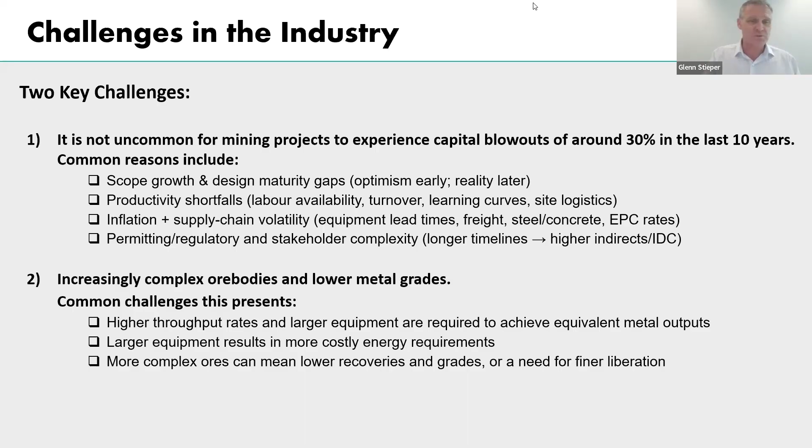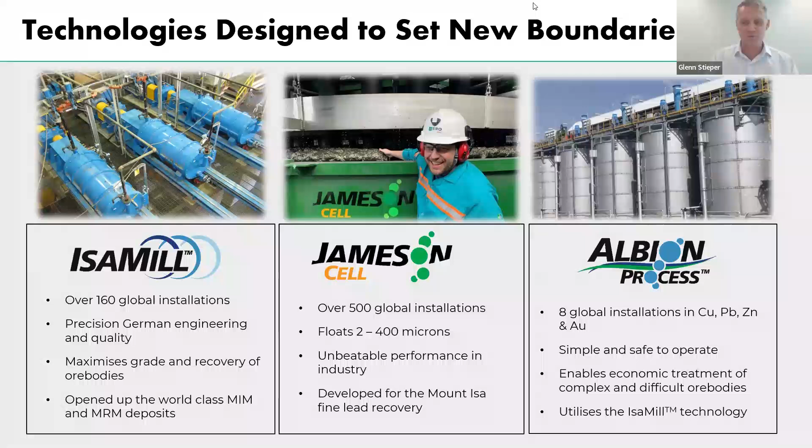Moving on to the first of my questions, which was around reducing costs: one of the areas we've been pushing quite aggressively into is combining the Jameson cell and IsaMill into what we call the Jameson concentrator. It's a full plant, meaning there's no conventional or other type of flotation devices there. It's purely just Jameson cells, which makes up the entire circuit. By doing this, we get around 1/4, maybe 1/3 less flotation units, so it's a significant reduction in size. It's also a big reduction in capex.

We see around 30% drop in capex, primarily driven by lower steel, concrete, and footprint. But we also have a lot of reduction in energy, around 45% lower energy. There's no blowers used in a Jameson cell, there's no agitators, there's really just pumps. That's the only moving part on a Jameson cell, which also makes it much lower in terms of maintenance requirements and spare parts. Everything else is basically static and very simple to maintain.

Just to the right, a couple of examples: we had the Jameson concentrator, which has been operating for quite a few years at New Britannia, a HudBay operation. 4 Jameson cells replace 11 tank cells, and that circuit is performing extremely well. Hermosa is a full concentrator currently under construction in Arizona, United States, with 12 Jameson cells replacing what would have been 40 tank cells — again, big reductions in footprint and complexity. At the Ozernaya site, shown at the bottom, 63 tank cells were replaced with 19 Jameson cells, and that's the picture you can see showing the huge difference in plant size.

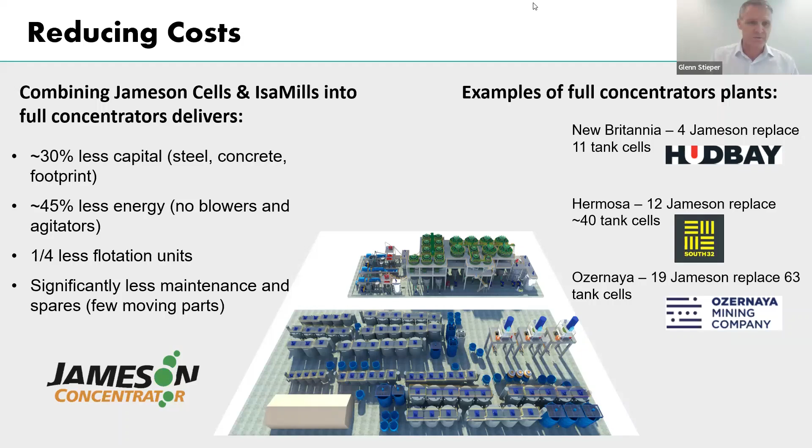So a question we obviously get quite often is: how can you do that?

How can you simply reduce it so small and yet get such high performance and have all those savings? I think the savings are obvious through the reduction in size and units, but how do you still get really, really high performance? That's probably the key differentiator and the reason why we're so excited about where this is moving the industry.

As I mentioned before, the particle size range is very important - the 2 to 400 microns, having that in a standard configured Jameson cell. Wash water systems enable us to essentially wash out all the gangue without sacrificing any of the recovery, which gives us a higher grade. But by washing out the gangue, it also gives us a huge reduction in mass pull, and that basically means everything going down the circuit is heavily reduced. You're not bringing gangue and clays and things like that into the circuit and oversizing your plant.

Finer bubbles that are generated also create significantly higher surface area compared to conventional flotation with big bubbles. And also, one of the key components - and this is the part that a lot of metallurgists in the industry for many, many years, almost a century, struggle with - is the fact that the flotation or the contact happens in around 2 to 4 seconds, not 40 to 60 minutes, which is what you have in standard configurations of your flotation circuit. So just having a quick look now at what that looks like on these graphs.

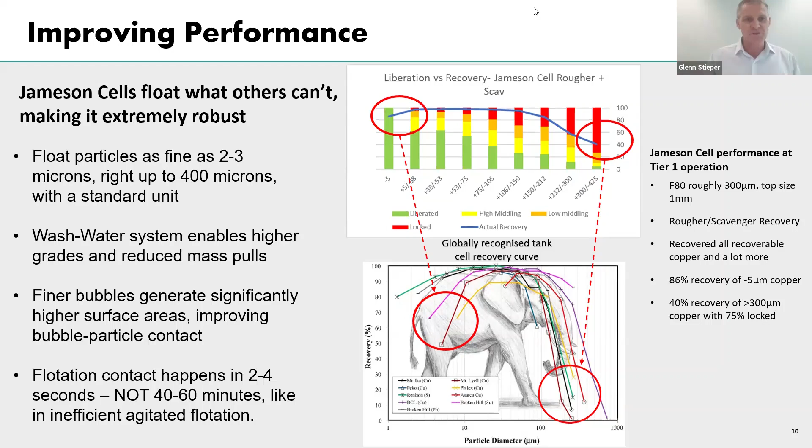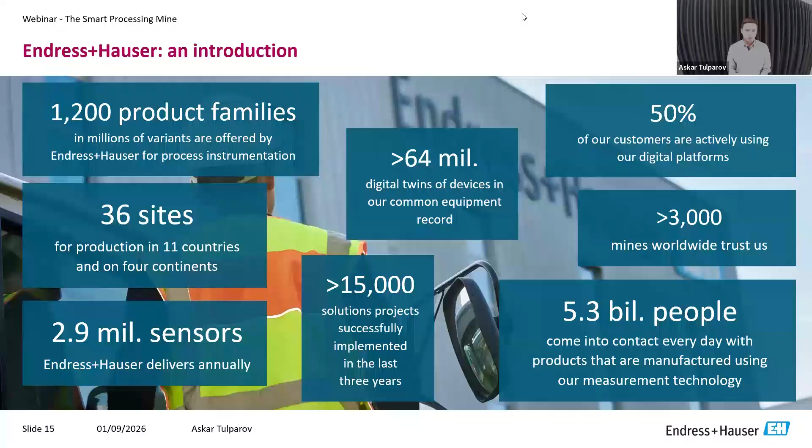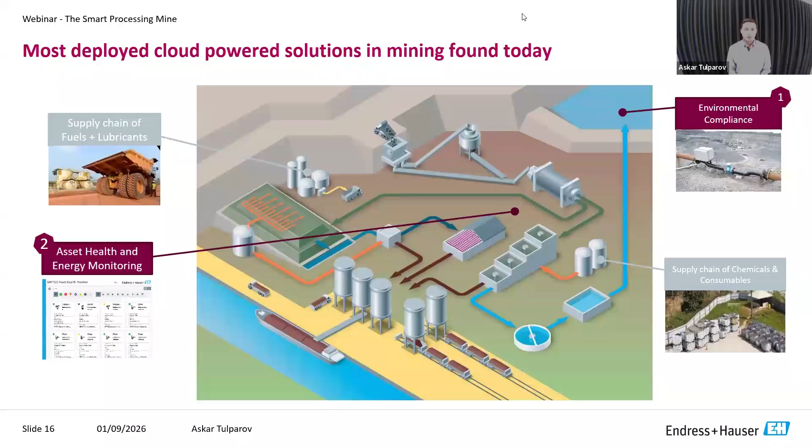Now, if we talk about mining in terms of solutions with cloud connectivity, we know that some applications and areas of the mine globally and in Australia have been more readily accepted than others. We find the most common applications in environmental monitoring and compliance, asset health and energy monitoring, and then supply chain monitoring, or monitoring inventory of supplies or fuels.

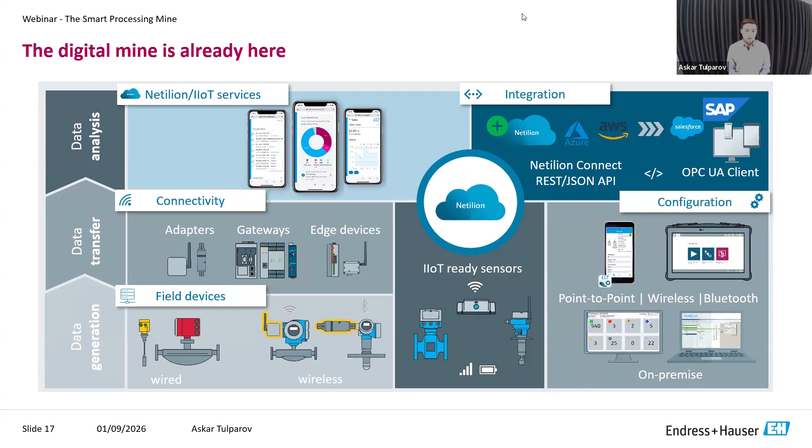Then asset management data is all available via digital communication outputs, and all of this can be managed either on premise or wirelessly. The ERP integration then goes via OPC UA client to provide the necessary information from the field devices. In addition, we can also rely on and use our own Netilion cloud-based industrial ecosystem as well.

Now let's have a look in more detail at the field devices and what kind of process parameters you can get from that instrument. First, condition monitoring, enabling predictive maintenance by identifying process conditions that may negatively affect device or asset integrity or process performance. Long-term effects like corrosion, abrasion, buildup, to know the optimal time to clean, then mechanical stress, thermal stress, or sensor aging from radiation gamma sources.

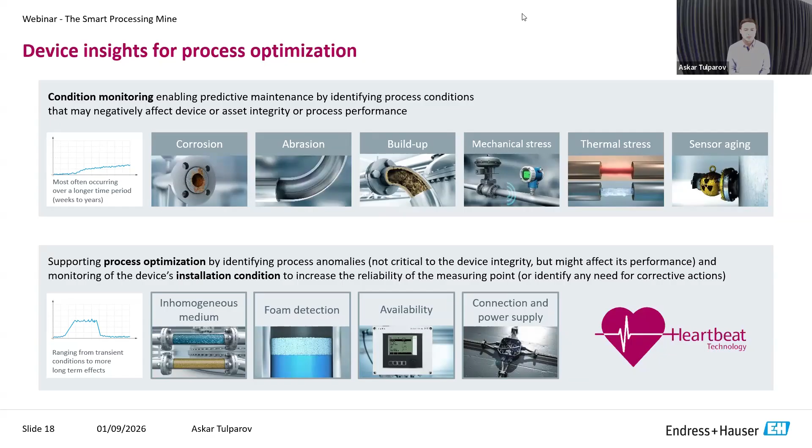Secondly, supporting process optimization by identifying process anomalies not critical to device integrity but which might affect performance, and monitoring the device's installation condition to increase reliability of the measurement point or identify any need for corrective actions. For short-term effects, we have a very high-speed Ethernet APL protocol, a new value with lots of potential - for example, optimizing mixing and blending or pump speed to reduce bubbles.

To support you in reaching your goals, Endress+Hauser has implemented its own Heartbeat Technology into many measurement devices across our product portfolio. Its unique diagnostic, verification, and monitoring functions all aim to support you in your daily striving to increase plant performance, with highest confidence in device performance due to outstanding diagnostic capabilities and international standard compliant development.

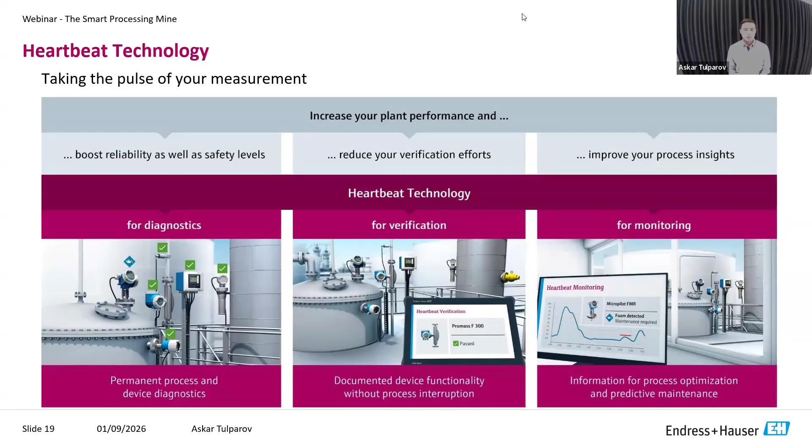Efficient operations are supported by timely, clear, and standardized diagnostic messages, providing easy to follow recommendations on the actions needed. Optimize calibration and proof test cycles through traceable device verification without process interruption, which is very important. This gives improved insight on device and process conditions to optimize the process and keep operations stable.

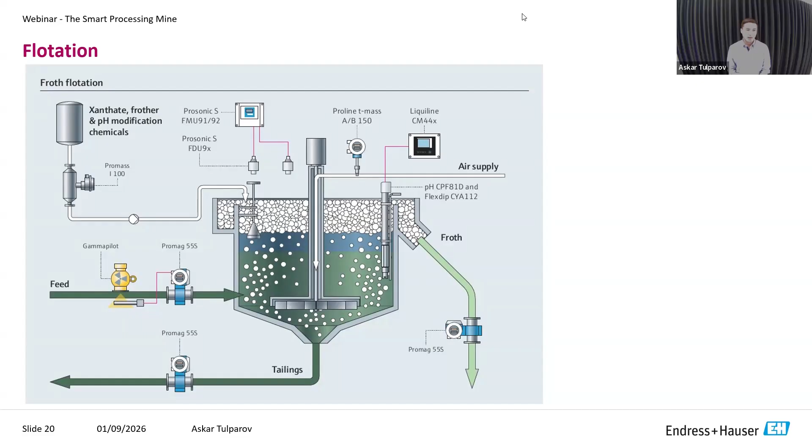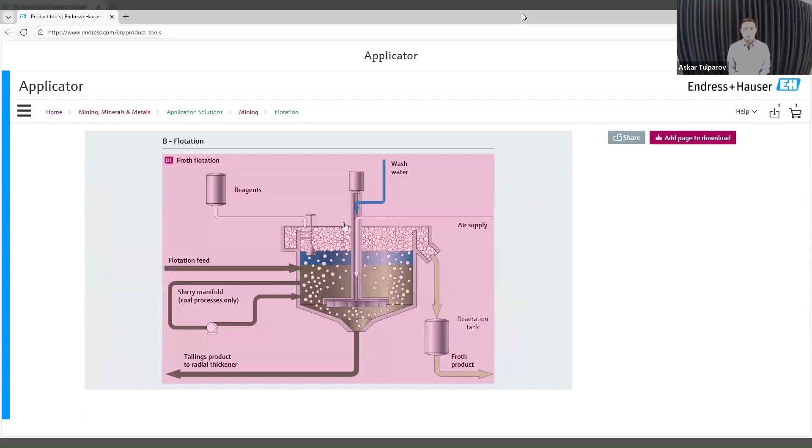To summarize today's speech, here's a short animation video showing that flotation process as an example, and generally how easy and fast you can get access to our online tool, the Applicator, to do full engineering sizing on your own at any time, to find the right instrument for your exact application needs, with detailed information like price, drawings, production time, spare part lists, and finally printed out results at the end. So my message to all of you: please feel free to open our website, test it, and use it on your daily basis.

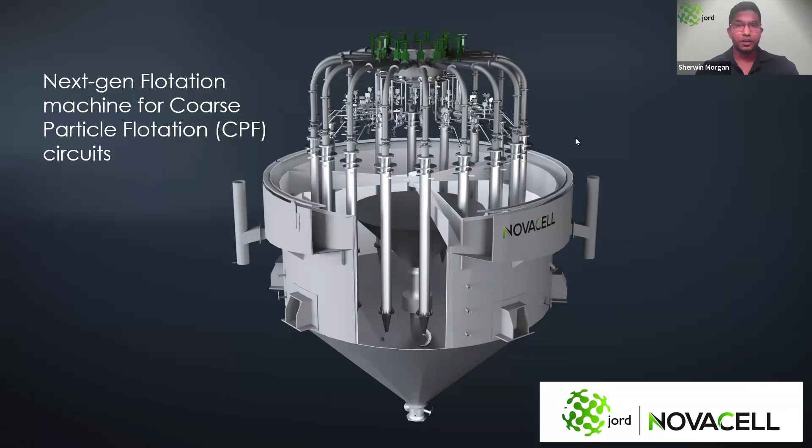So this technology is being commercialized by Jord. Jord is an Australian company, privately owned. It services multiple industries, and the Novacell and the Viper sit in the minerals processing group. Jord has been around for 50 years and has plants in multiple countries.

So why is there a big buzz about coarse particle flotation? Most of the tier 1 miners and mid-cap miners are starting to include this in their flow sheets. It's because it adds a lot of benefits.

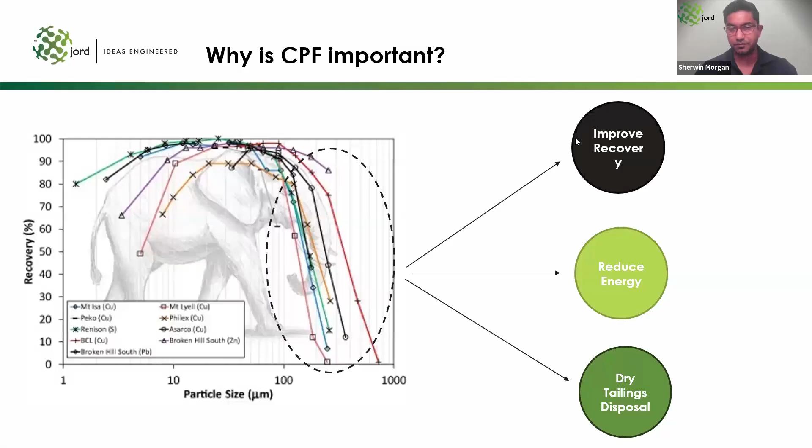It also allows you to reduce energy. So if you can recover particles at a coarser grind size, there's less energy in the comminution circuit. And then finally, if the particles are coarser, it's far easier to dewater, so it then opens up opportunities to adopt new tailings management solutions.

So why is Jord's solution different to what else is out there in terms of coarse particle flotation? Mainly because we've simplified the flow sheet. Because we can recover fine, intermediate, and coarse particles, there's no need to have an upfront deslime circuit.

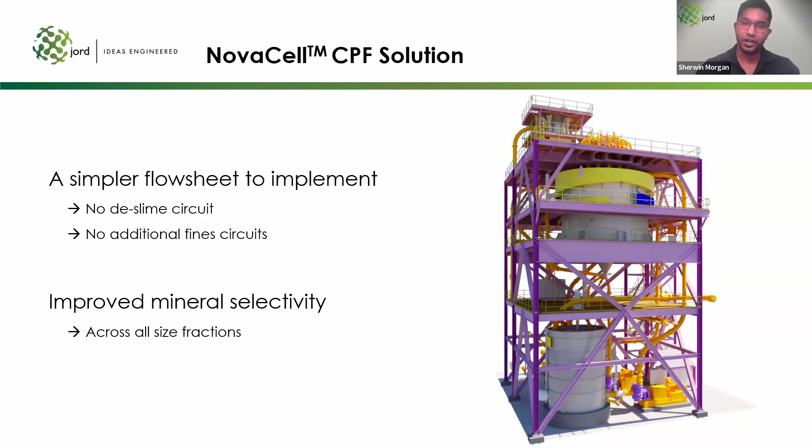A lot of the existing technologies struggle on the finer end, so they need to remove these particles and treat them separately in the flow sheet. With the Novacell, we don't have that challenge. We put everything through one device, and we're able to get mineral selectivity across all particles.

So here's a case study. We've been working closely with Capstone Copper for a few years, and we've tested this technology at one of their mine sites in Chile, called Mantos Blancos in the Antofagasta region. And there were two key criteria that Capstone Copper wanted: firstly, there was a recovery target, and there was also an enrichment target.

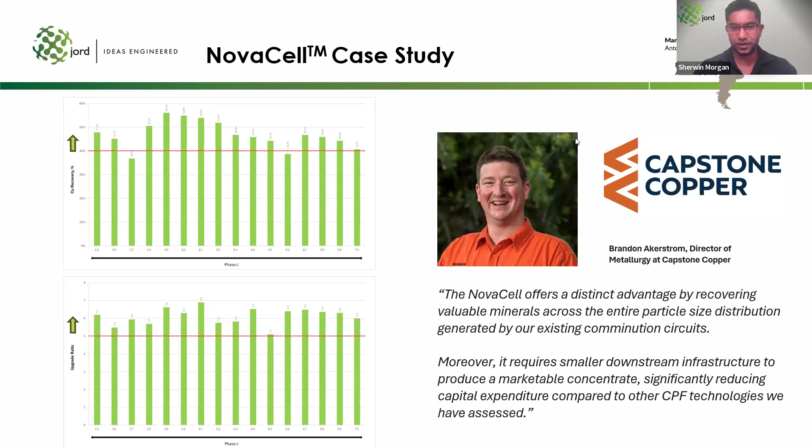So finally, if you're interested in this technology, we offer two ways to investigate it. We have a lab unit here in Australia, at Core Resources in Brisbane, but also we have a unit in Santiago in Chile at AMinpro. We also have a pilot unit that comes in two 20-foot shipping containers that can be set up on site to test this technology. I'll now hand over to Sam, who will talk about the Viper.

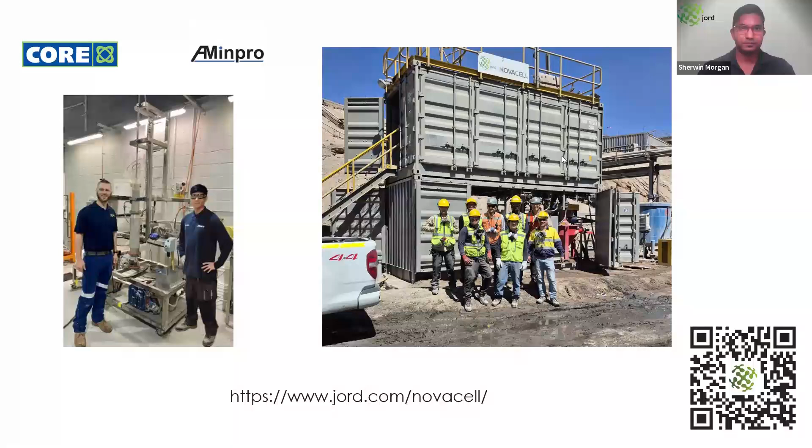Just as Sherwin did at the start of his presentation, I'd also like to note the similarities between some of the content I'm about to go through in the dewatering space. That's very similar to the theme Glenn established at the start of this presentation, based around how companies are looking to overcome capital blowout headwinds for new projects, and ways to manage complexity with new innovative processing solutions.

In the vacuum belt filter space, Jord is one of the leading suppliers in Australia, where we've been building these systems for over 30 years. Out of that experience, the Viper technology has been born. So what is the Viper technology? It's our patented innovation that significantly improves the baseline performance of the traditional vacuum belt system, a technology that's been around for that whole period.

We've recently invented these Viper modules, shown in the green module sitting on top of the belt filter in this example image. These modules can either be delivered as new equipment, as a fully assembled Viper vacuum belt filter, or retrofit onto existing vacuum belt filters in order to reduce the final moisture content of the cake being discharged and/or increase the capacity of the existing belt filter.

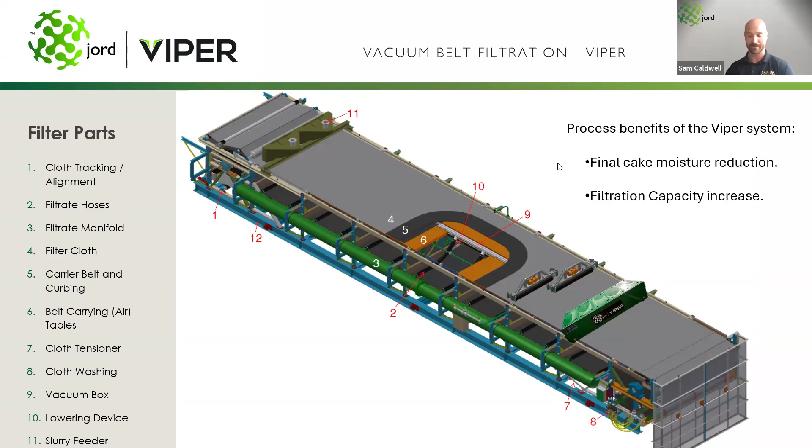Those two main benefits are really important in the dewatering space, because it unlocks the vacuum belt filter for more challenging, historically difficult to dewater applications. The reason that unlocking is important is shown in this comparison image here.

On the left-hand side and the right-hand side, we have two processing plants built in Australia that are operating the same tons per hour of solids, processing a very similar feed type in gold tailings material. The plant on the left-hand side is a filter press plant - Jord also manufactures filter presses - which we delivered a couple of years ago. The left-hand side plant is much larger, as you can see in this comparison. It's more complex, and therefore a much greater cost and more challenging to operate.

On the right-hand side, post the invention of Viper, we have a smaller, more simple overall layout that's lower in capital costs and more simple to operate. To give you a gauge of the order of magnitude of reduction in capital spend and operational expenditure for the dewatering scope in these projects, we're looking at anything of 50% or more reduction in capital costs for the dewatering solution for a given application, and at least a 20% reduction in operational costs of that plant over its life.

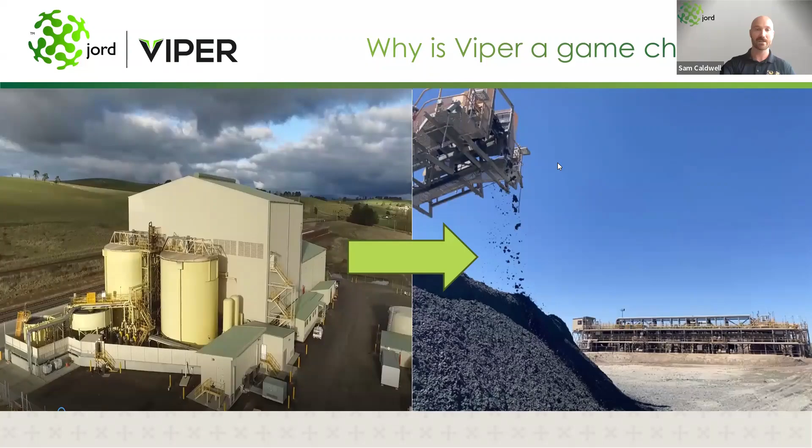So some pretty significant step change reductions in both CapEx and OpEx costs, with the ability to now select the vacuum belt filter for a given application based on the existence of this Viper technology. In regards to our operating references, we have in the order of 100 Viper modules operating around the globe today.

Currently, I want to highlight this reference: the largest duty is the dewatering of fine grind magnetite concentrate at this plant in Port Hedland, WA, with a duty in the order of 20 million tonnes per annum of magnetite concentrate. The real significant point is 100% of the saleable product from this mine needs to be dewatered by these belt filters, which is the last stage of the flow sheet before it gets conveyed onto a ship and sold to the client.

So if we can't meet the performance, moisture content, and tonnage requirements for this project, there is no further piece of processing equipment between this plant and sale to the client. I like to highlight that to really reflect the level of confidence the existing customer base has in this technology today. Thank you, Sam.

Sorry, go ahead - sorry, your time is over. Do you want to just finish up quickly if you want? Yep, sure, just take 10 seconds here.

In order to scope up your given application, we have bench scale and pilot scale test work capabilities in order to identify and demonstrate the benefit that this technology can bring to your application.

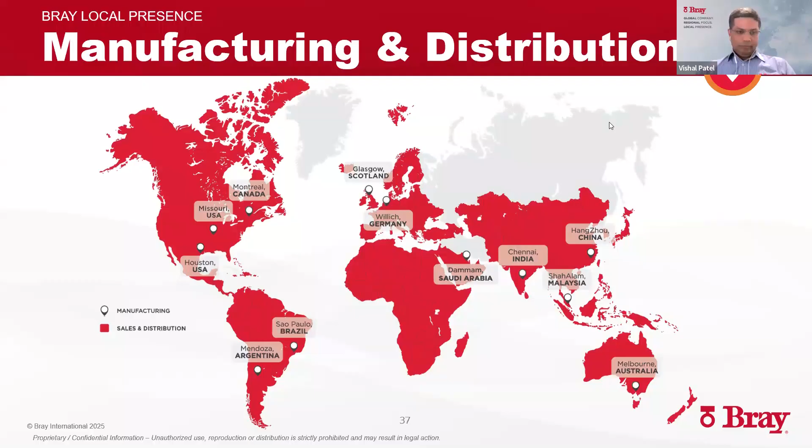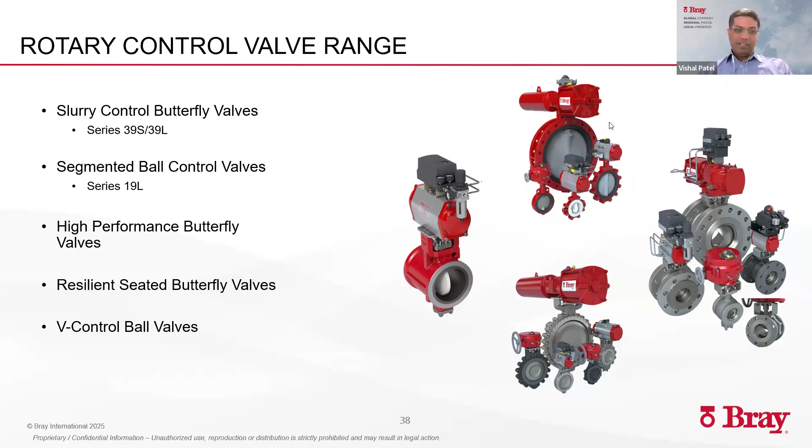A quick snapshot on the rotary control valve range that Bray has. In the interest of time, today we'll only be looking at a couple of them, but we have slurry control butterfly valves, a Series 39 S and L, segmented ball control valves. We'll be touching on Series 19L.

We also have high performance butterfly valves, resilient-seated butterfly valves, as well as V-control ball valves. The Series 39 slurry control butterfly valve was initially designed or engineered by Bray Pacific to cater for the alumina industry for the arduous high abrasion, high velocity, and scaling applications. On the back of the success in that industry, the 39 series slurry control valve has made its use case in the mining industry as well.

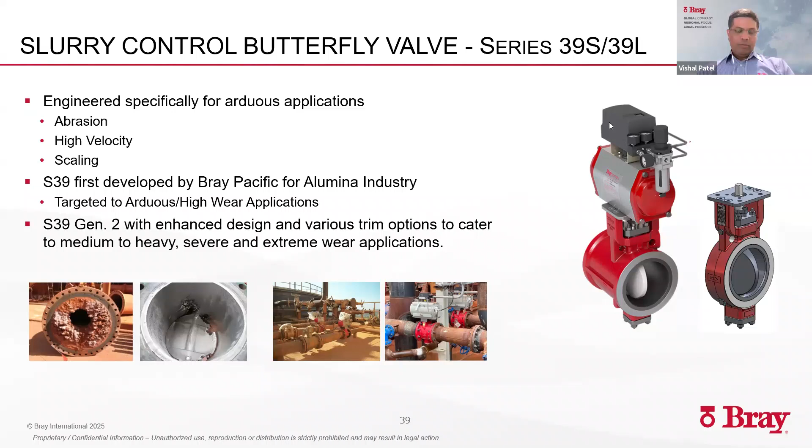Most recently, we have what we say is generation 2 of the Series 39 slurry control valve, which has an enhanced design with various trim options to cater to medium to extreme wear applications. This particular slurry control valve has a fully lined body with no dead pockets and a hardened material disc, which is a swing-through design. We have various options from a trim perspective, depending on the severity of the wear and the application, where we would specify either a 4mm CO1 or CO2 trim on the lined versions, up to a size of 600 mil.

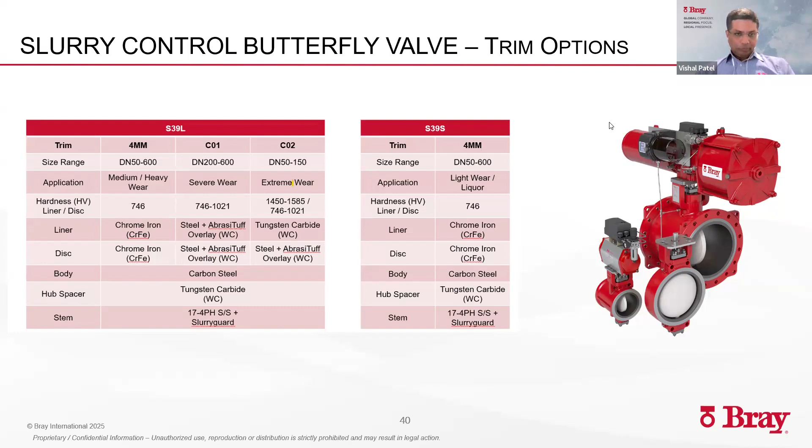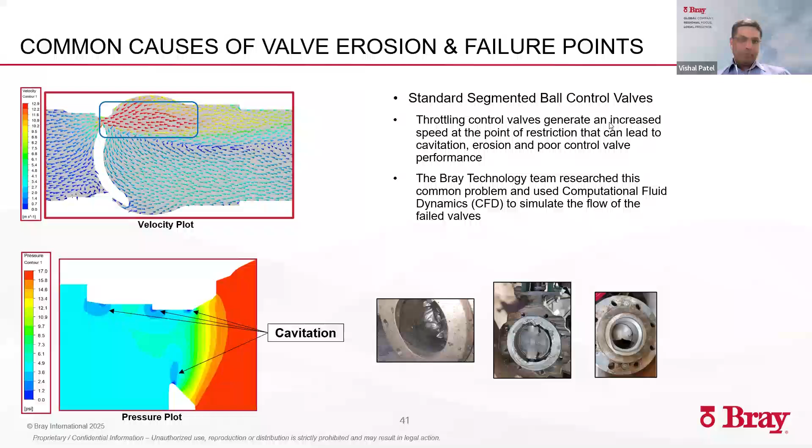So Bray teamed up with our engineers and came up with a solution which combines a few factors to cater to these erosive service applications. A Bray Series 19L was developed as a drop-in replacement for the standard segmented ball. What we did is reverse the flow direction and combine it with hardened material selection and design enhancement on the drivetrain side, which I'll show in the next slide.

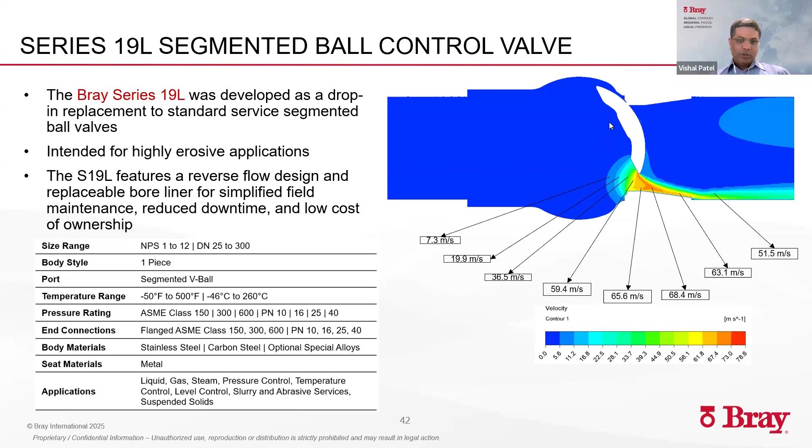Basically, the salient features are reverse flow direction, and it's also got a pressure balance seat design, which allows full differential pressure sealing and keeps the actuator sizing down. Engineered materials of construction are used where the highest velocity points will be seen, at the downstream side of the seat, which is hardened solid tungsten carbide. It also has a downstream liner to protect from high velocity or abrasion, which is also solid tungsten carbide, combined with a hardened segment, with various options there — tungsten carbide or colmonoy.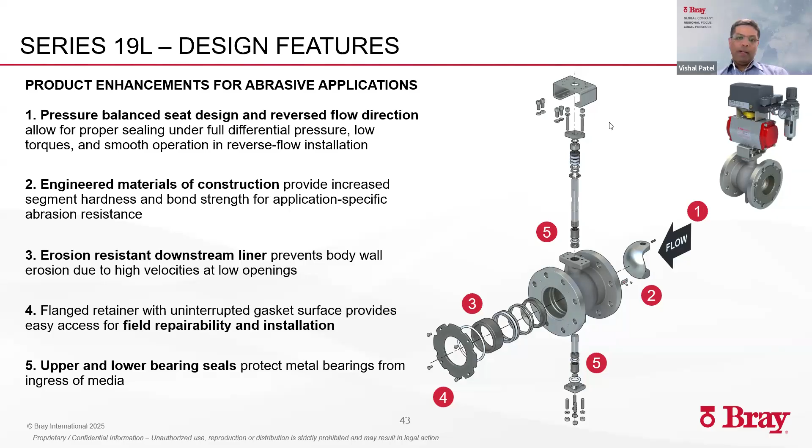We have various levels of trim, and we also have the option for cladding the body depending on the application. Field repairability was also kept in mind in this design, where the plant doesn't need to remove the whole segment assembly to maintain it, but can just replace the flange, the retainer assembly, and the liner to perform on-field maintenance, replacing just the wear components. We also came up with bearing seals, top and bottom, to protect the drivetrain from any media ingress, which can cause jamming or premature failures.

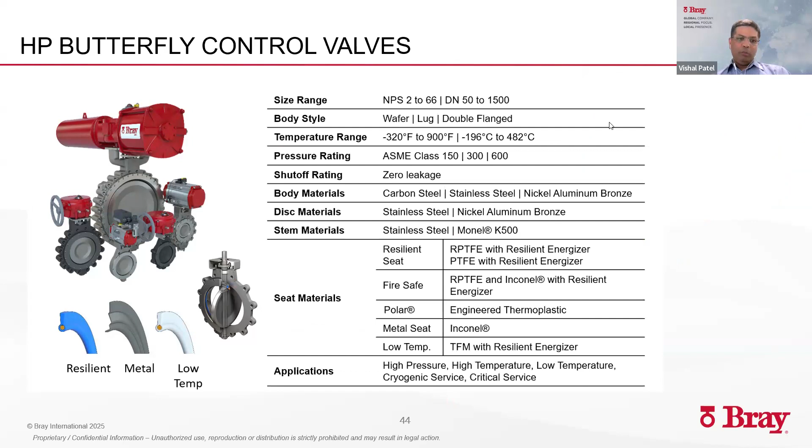A quick snapshot of our high-performance butterfly control valves. I won't go into too much detail here, but we have various options, can go up to 1500 mil, with materials of construction from a seat perspective, as well as body and disc.

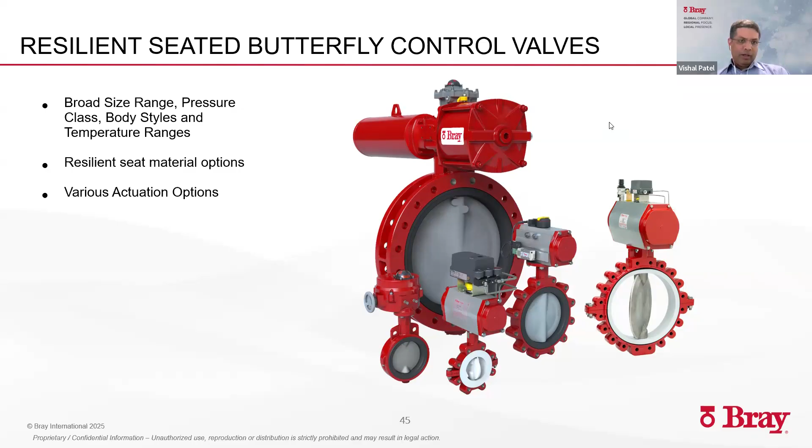Resilient seated butterfly valve range. There are also many options, sizes up to 2400 millimeters, various pressure ratings, various seat options depending on the application, whether it's highly corrosive or chemical, including polyurethane lining for some abrasion resistance.

We all talk about, as the previous presenters mentioned, how efficiencies are required within modules and overall from a mineral processing perspective. A control valve goes hand in hand with a smart positioner, which is the brain, able to tell that control valve to move from one set point to the other as desired by the process requirement. A smart positioner plays a big role.

I'll just concentrate on a couple of points for our 6A smart positioner, which has a zero bleed design. From a sustainability perspective, we are looking at a lot less air consumption in steady state, and from an environment perspective, it's pretty good.

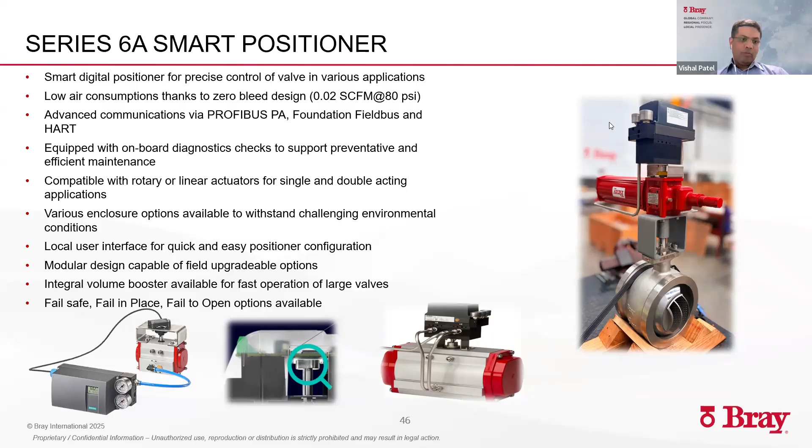It also has robust, advanced diagnostics, which provide preventive and predictive maintenance for those control valves to be fully integrated.

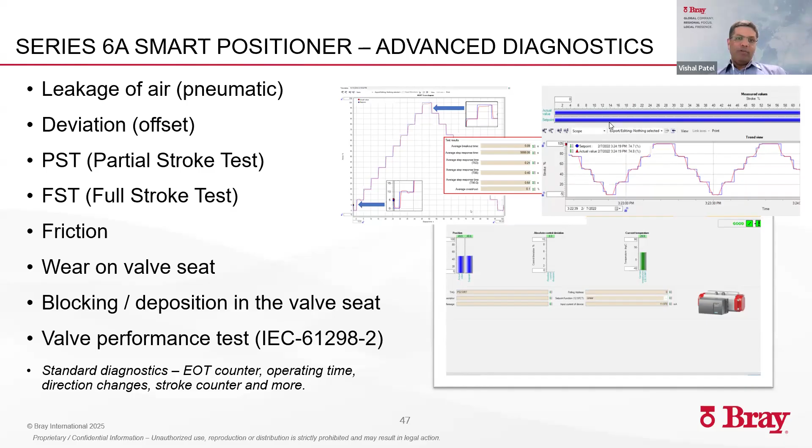If you look at various options on the diagnostics side, the advanced diagnostics can provide full stroke testing, multi-step response testing. There are some screenshots I've shown of what can be extracted if we use the right protocols and measure it up when the control valve was delivered, building a program as a predictive maintenance program rather than any surprises.

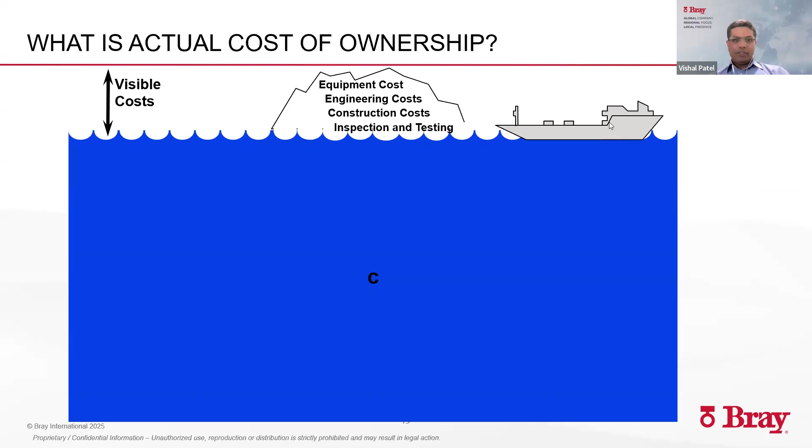Various options are also available from a feedback perspective. When we talk about cost of ownership, we always look at the tip of the iceberg, generally where equipment costs, engineering costs, etc. are taken into effect. But there is a lot underneath, which is exacerbated by using either a wrong valve or a different positioner which doesn't have repeated positioning, etc.

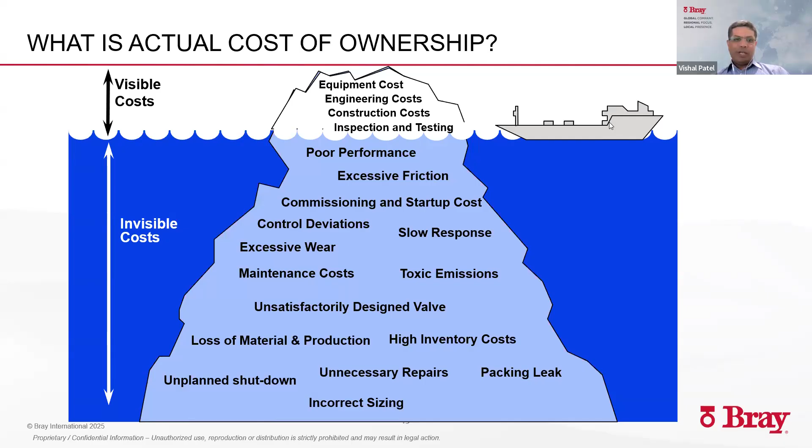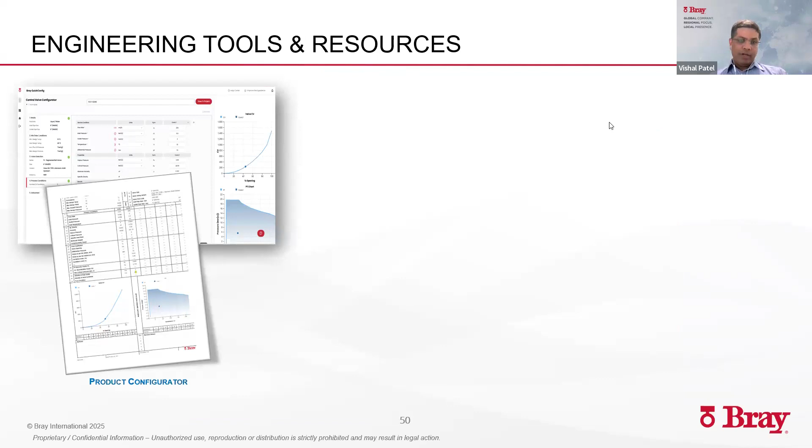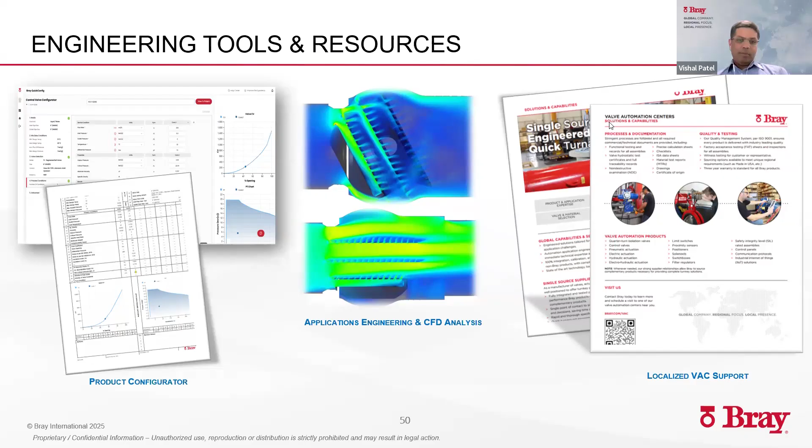So how do we cater to that? We, as Bray, have a valve selection process utilizing our in-house product configurator, which we can use to size control valves as well as actuation. Our engineers are there at your disposal to perform CFD analysis or applications engineering, as well as we have a valve automation center, which is there to support post supply or for any emergency that may arise.

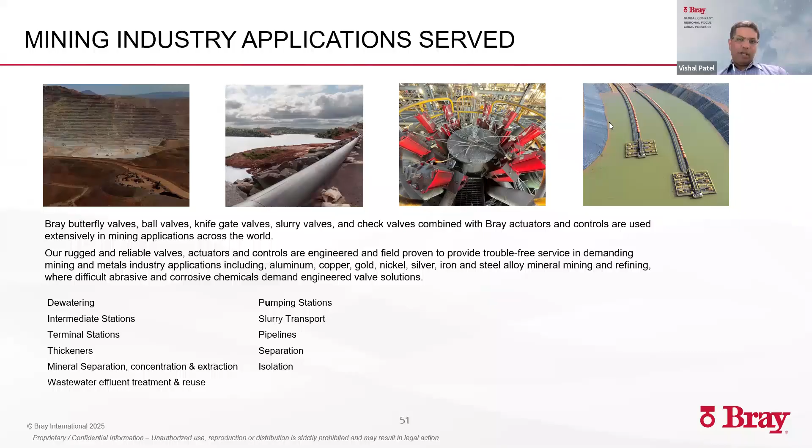There is a lot that Bray has in its product portfolio. I won't be able to do justice to its full portfolio in this short period of time, but we have all the valves, actuation, and controls that are required for a mine to be efficient. So please reach out to our teams.

Thank you, Vishal. I actually started my career in the valves and pipeline industry, so it's always good to see how it keeps developing with good engineering.

So let's move on to questions before we wrap up. We received a question today from James from Always Carbon, asking what is the water consumption per ton produced? Is that more or less than traditional plants? Who would like to answer that question?

Maybe Glenn or Oscar? I saw that question pop up. Look, in terms of the Jameson concentrator, in general, the water itself is a water balance. So unless you're coarsening up the feed, as Sherwin and others mentioned, which will make your filtration a lot better, meaning you can stop pumping it out to the tailings dam, it will obviously have a big impact on your water retention. In terms of the Jameson Cell, though, it operates similarly in terms of percent solids to what you'd find in most other flotation devices.